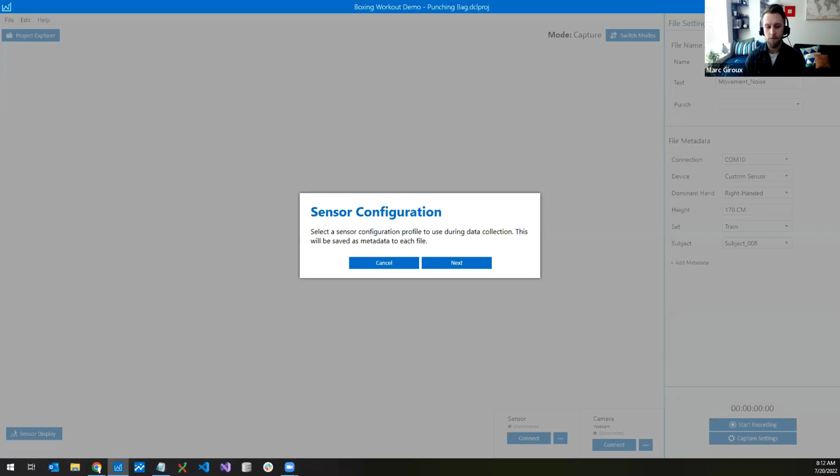So let's jump into capture mode. This is where we are going to do live collection from a device. So the first thing to do is select your device.

We have a range of devices here that are supported from all the big players in the industry. But I also wanted to point out that you can create your own plugin for any device, even if it's not in this list. There's an open source format we have called the simple streaming specification, and as long as your firmware implements this specification, you can use it within the data capture lab.

So I have this custom sensor here sitting with me. I'm going to go ahead and connect to it.

I wanted to point out, we do support 3 different connection types in the data capture lab when you build a model: Bluetooth, serial port, and Wi-Fi TCP/IP. And we support, like I said earlier, this sensor happens to have an accelerometer and microphone on it, but you can add your own sensors and it can be whatever you want it to be.

All right, so now that I have my sensor connected, I'm going to connect over serial. I've already set up this connection, but you can change your connection method over here. And I have this device sitting on my desk.

A big thing we think is important as you do data collection, that we find useful, is seeing the data happen in real time. So I have this device sitting on my desk. I'm connected to accelerometer right now, and I can see the data coming in.

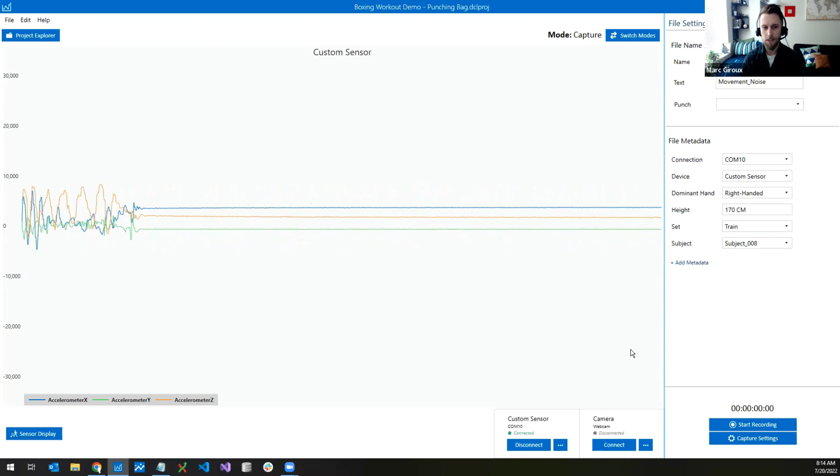So first, I'm just going to show an example of just collecting a file, and then I will get into how to label that file. So I'm going to hit start recording down here. And now I'm collecting real data from this file.

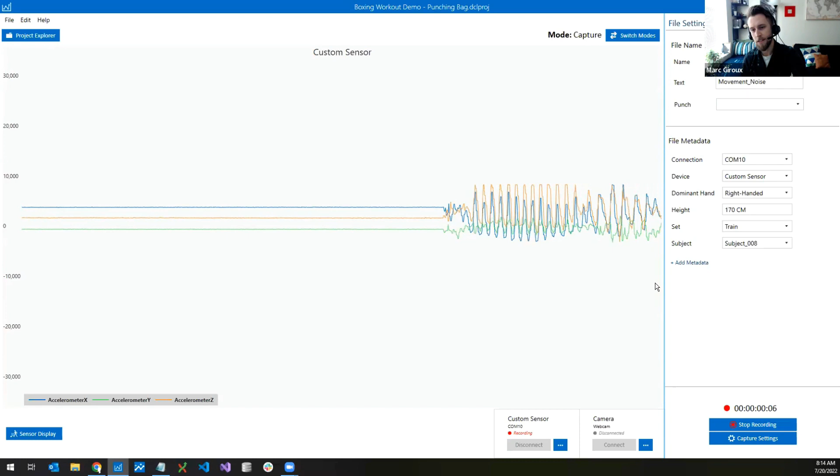This is our boxing demo. I'm just going to collect some noise data here. And you get the save confirmation screen.

The important part here I wanted to point out is the file metadata. You can add any sort of custom metadata you want to your files. This is an important feature because, like I said, it's an iterative process to build a model. You're going to be retraining a model, adding new things, and you're going to find out maybe I need a different model for a right-handed person and a left-handed person.

The other thing that's cool about metadata is you can set up, we typically always have metadata on our projects that is a training set of data and a test set of data. So you can leave data out of the model and pull it in and do testing on it later. And like I said, this is all customized to be whatever you want it to be. This just happens to be what we use for this project. For other projects, we might have other metadata.

So it's a movement file, it's just some noise that I added. So I'm going to hit save here. When you save that, it's going to automatically add it to your project.

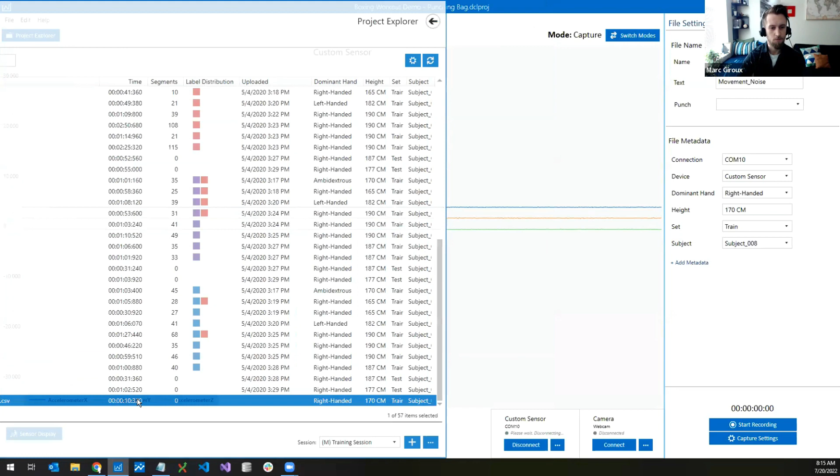This is the Project Explorer. I'll go over this in more detail later, but you can see here's the file we just collected. And I can open that file.

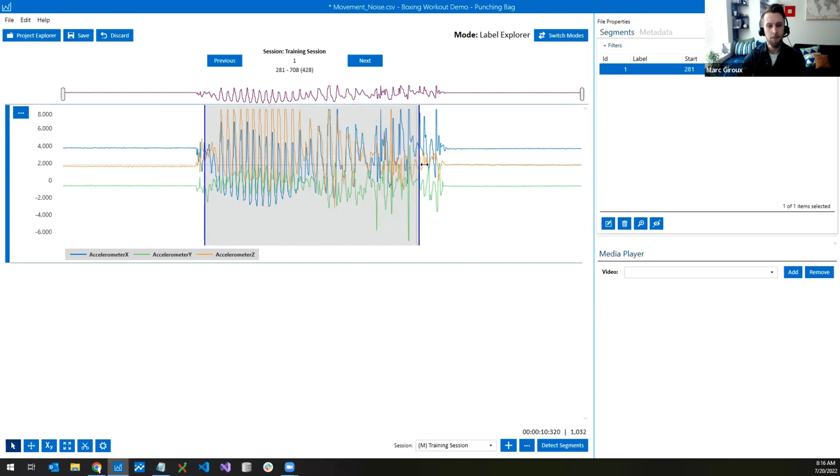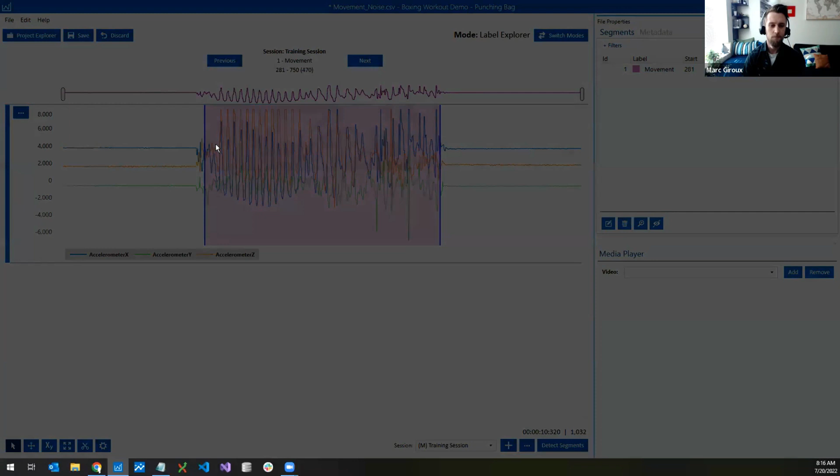Next, I'm going to go over how to actually add a label to this file. This is kind of the standard approach to labeling. I'm going to be getting into a lot of the automated tools and ways that we make this much easier for you, but typically you can see your file data, right click on the graph, and add a segment across the data. And when you click edit here, I can say that this is some movement data, click done, and hit save. That's the typical way you would label a file.

But let's go back to capture mode.

When you are labeling a file, that was a short file, a 10-second file. You might be labeling it for more than 10 minutes, you might be labeling for an hour. I'm going to point out the live labeling part of the data capture lab, so you can add labels in real time as you're doing data collection.

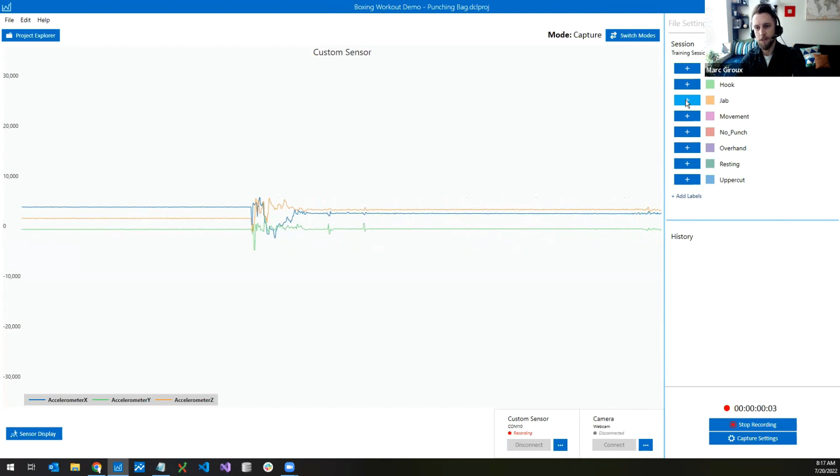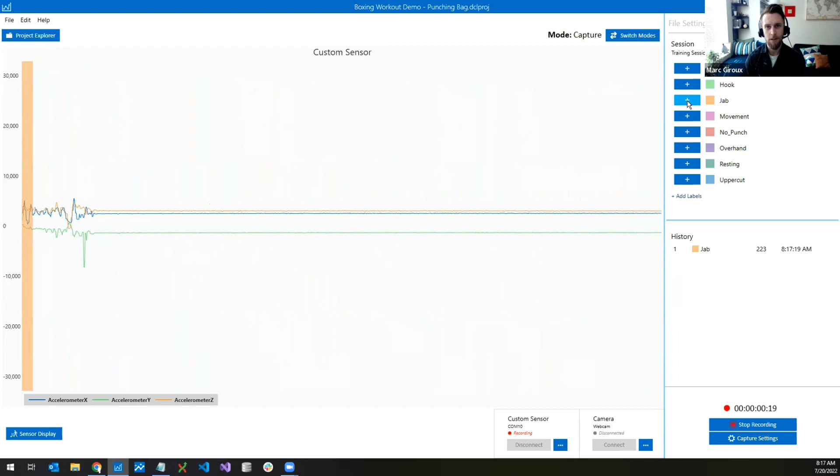If I click start recording here, let's say I want to do some jab labels, I can click jab, do a jab, and click done. This is a small file, but if you're doing 10 minutes of data collection, to go through and custom label everything after the fact is just wasted effort and time, when you could just be labeling it in real time.

I'll hit save here again, and we'll say that this is a jab file. You get a review screen, so in case you messed any labels up as you were labeling, you can edit them here and change them or delete them if they were bad labels. So here's our new jab file - you can see it added the label in real time.

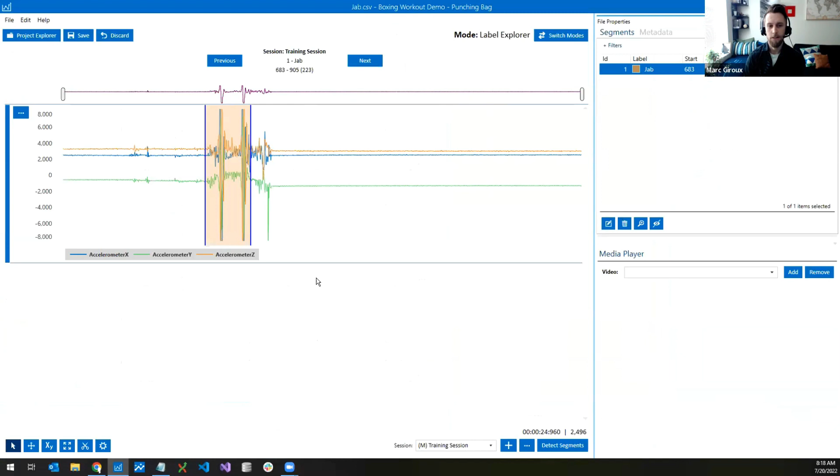Then the other major feature, I think this is one of the biggest features in our data capture lab, is the ability to, we have this test model tab up here. Once you've already built a model, chances are the model is not going to be great the first time, and you need to add new training data to make it better. We can actually connect to a model in the data capture lab and see the model results happening in real time. This is a good way to test it, let alone retrain your data set.

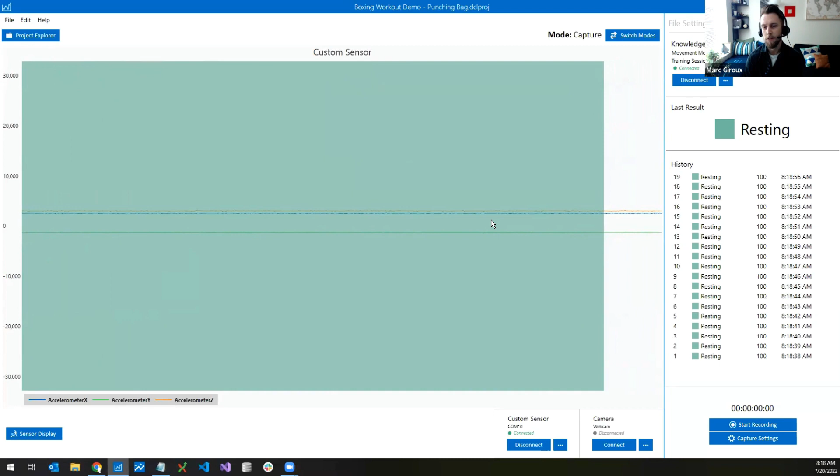We're emulating the model right now, and you don't even have to flash it to a device yet. So even if you haven't set up your firmware yet for models, you can test it out right away based on your training data set.

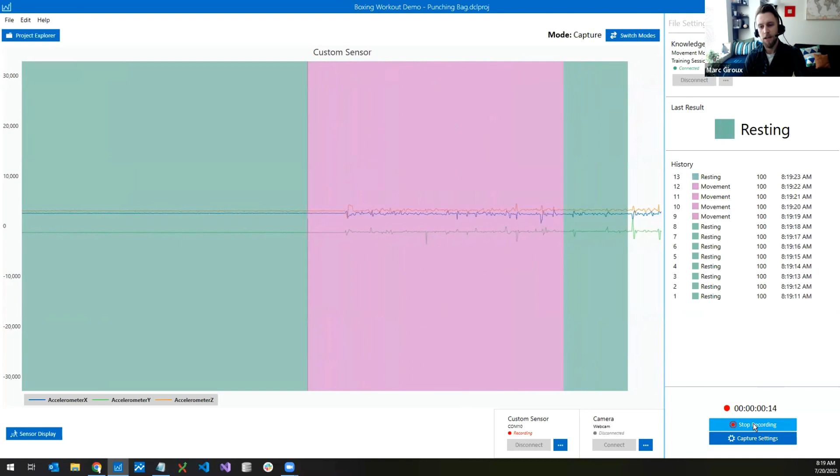If I click start recording here, I can now actually save these results as they happen in real time. Let's say right now this is resting on my desk, and if I just barely touch the sensor, it's coming up as movement. But maybe I don't want that movement to be classified as movement - maybe I want all of these light taps to be considered resting. So it's a false classification.

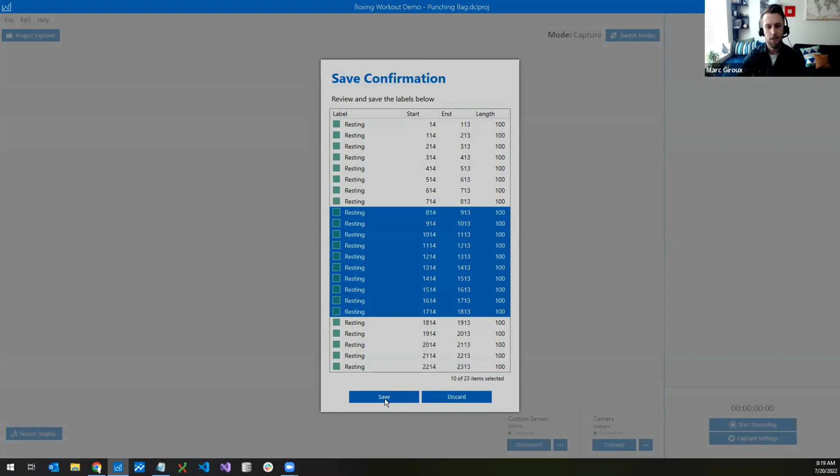If I hit stop recording here, and say this is movement again - here's all the labels I just collected. I can highlight all of these, say that these are actually going to be resting, and click save. And if I open up that file, this file has already been labeled with all of my resting labels, and that's from the model.

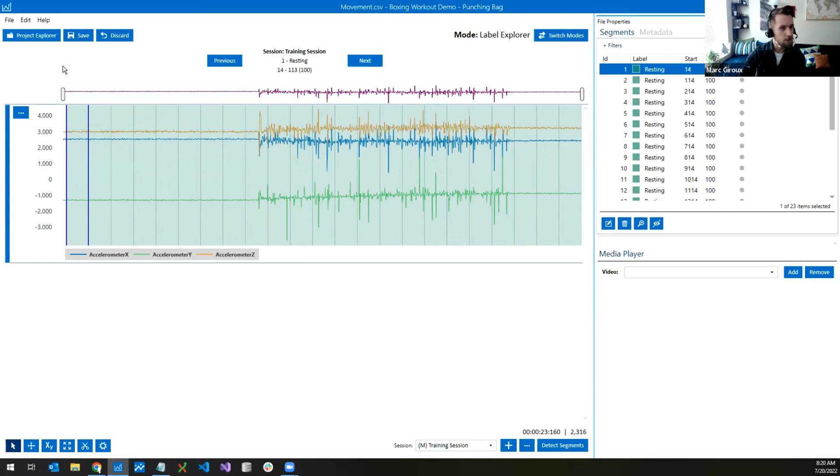So next, we just showed how to connect to a model in capture mode. Not only can you do this in capture mode, but in the label explorer - here's our project view, and this is all of the files that I've already collected before this session. You can see I have my metadata up here, and you can see I've left out some test files here.

So I can actually highlight a list of files, right click, and use that same model - we call it a model knowledge pack in our toolkit - to label these files after the fact. I just ran that model across these files, and this is the results it came up with. I could change them or edit them. You can see the file name is jab, and it looks like we had one false classification in this based on that model.

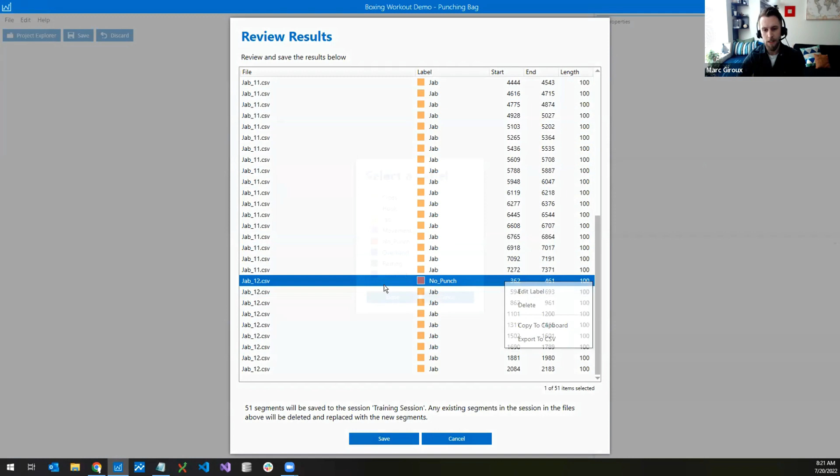So if I wanted to improve my model, all I would have to do is edit that label and change it to be jab and hit save. Now these two files that I just selected are all labeled as JAB instead of having those false classifications, and that's all from the model.

So I could essentially relabel this entire project based on that model within seconds. It's an extremely powerful tool to be able to connect to your model and see the results, then relabel and retrain your model with those results. So I'm going to actually clear out these segments because we don't want them as part of our training data.

And so I just went over the efficient way we have this feature right here from Knowledge Pack. But I'm going to skip over these three features and move on to the next part, but I just wanted to mention them. We do have three other features for bulk updating files in the Project Explorer. So you can highlight a list of files and add your labels to them through all four of these features. And I suggest checking them out on our website.

But before we move on, I wanted to point out a more detailed view of the file open screen. So I've opened up a file here. You can see I've labeled this file. There's four labels for uppercut right here, 3 labels for hook right here, and 3 labels for jab right here. I'm going to first go over the media player down here in the bottom right.

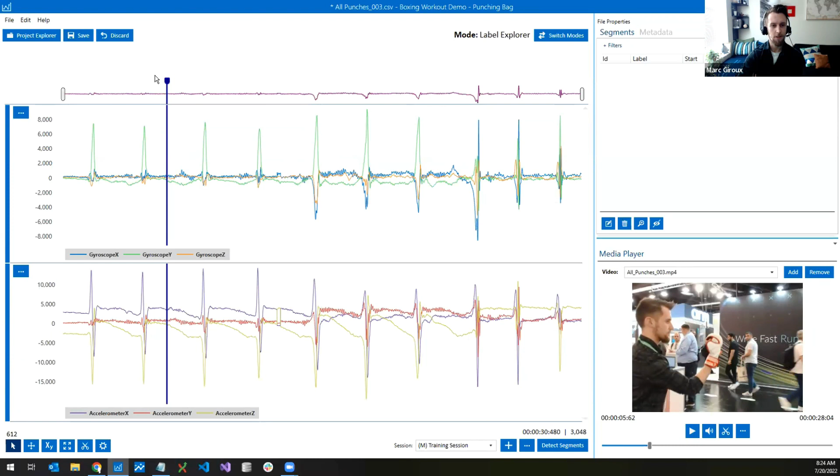And so I can see each of these are uppercut right here, and then jab, and then hook, and then jab at the end. And so this video feature is also a powerful feature for making it easier to label data.

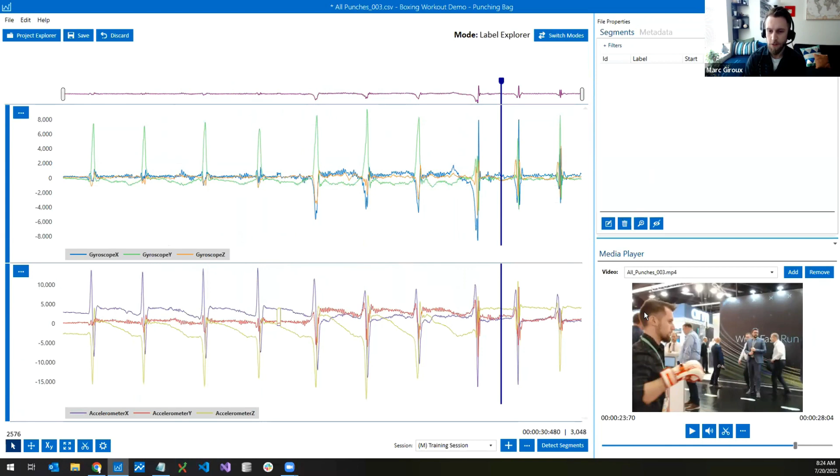I meant to mention this too, in capture mode. While you're doing the live data collection from your device, you can also connect to your webcam. Since I'm using webcam in Zoom here, I would not be able to do that right now, so I skipped over it. But connecting to a webcam means that as you do your data collection and you go and open up those files, it will automatically show up as videos in your files.

So the other feature I wanted to highlight in this screen is, we have this concept of a track in the Data Capture Lab. You can see here, I have a track for my gyroscope data, a track for my accelerometer data, and I can customize the height and range of these tracks. I can lock the y-axis, set my own specific y-axis range. I could add a new track.

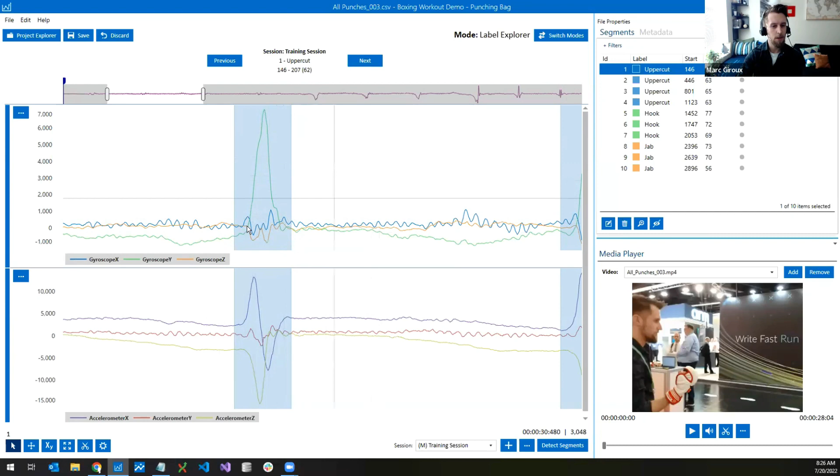And so if we look at this data here and we zoom in, you can see the gyroscope y-axis right now is kind of encompassing all of this data. And so maybe I want to pull out that axis. I can easily do that by clicking update columns, taking out gyroscope Y. And I could add a new track if I wanted to, add gyroscope Y to that new track, and take a closer look at how that affects the data.

And so this is all great for the first time you label, but as I mentioned, when you're building a model, chances are you will have to edit your data. So say I built a model and decided that all of these labels here were maybe too small. They're pretty tight on each of these events. Let's say I want to make them a little bit wider. Technically I could go in here and one by one make each of them a little bit wider, or I could move them over left and right. But it's a pretty time-consuming process.

This project has probably over hundreds of labels in it. And we've had other projects that have thousands and thousands of labels in it. It's a big ask to ask someone to go through and manually update each of the locations if they need to edit it. So we do have a tool that allows you to highlight a list of labels, right-click, and we have 3 different options down here.

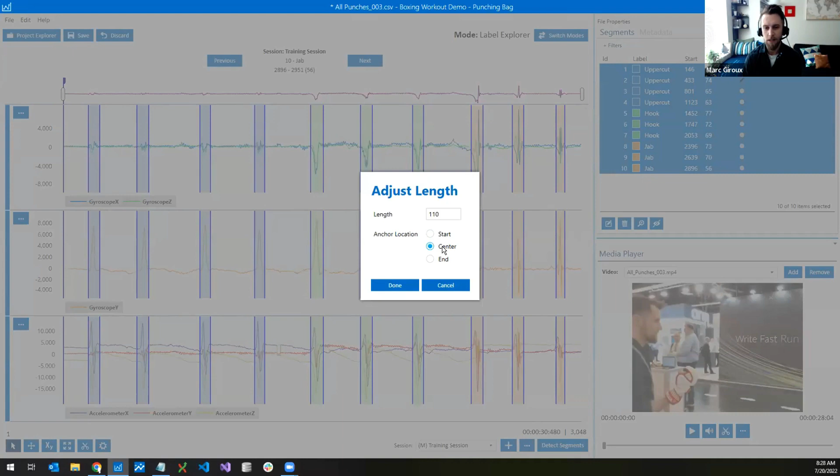We can anchor the location. We can make it 110 samples from each of their start locations or the center location. But since these are all pretty centered, I'm going to go ahead and make the anchor location from the center and expand out. And when I click done here, all of the labels are now the same exact length. They are from the center and they're a little bit wider now.

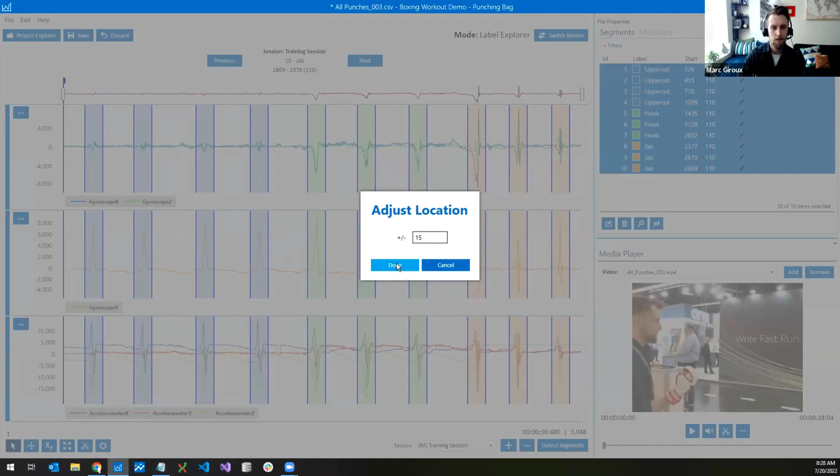The other big thing here that I'll focus on is adjust location. So same thing as length, except it's just moving the labels left and right. So you've got the right length, but you want to move them over a little bit. You can click adjust location. And let's say I want to move them 15 samples to the right, click done, and they all just shifted to the right a little bit.

And so with these tools, it really speeds up the labeling process. And like I said, I didn't go over some of them. I didn't do the adjust size feature, and there's also a tool down here for if you don't know exactly how far you want to move it, you can turn on the move toggle right here, and you can move them over by using your keyboard. And you can see on the segment tab up here, they are all moving left and right.

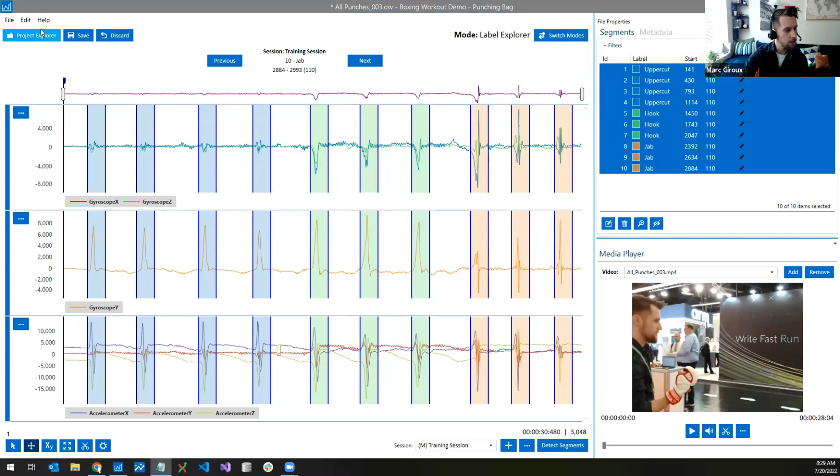And then the final thing I want to go over is some more parts of the Project Explorer. So you can see here in the Project Explorer, here's our metadata that we've added that I mentioned earlier. We have our training set data, how tall someone is, if they're right-handed or left-handed.

The other thing I wanted to point out is the label distribution column here. You can see all of these files that have already been labeled, and you can hover over this label distribution column and see the breakdown of the labels in those files. And so this file looks like it has 2 different labels in it, but if I highlight over that, it's actually 98% the right label. There was 1 bad label in here. So this is great to see it on a file by file basis.

Another nice part is you can actually highlight a list of files, let's highlight all of our files in the project, and you can right click and see the label distribution based on the selected files. And so this is a good tool for seeing your total distribution in your project. You can see the project breakdown of all your labels. The jab, hook, uppercut, overhand labels are all pretty even. They've got about 20% each.

You can see a breakdown by number of samples instead, because just because there's 373 jabs doesn't mean they're all the same length as the other ones. And so you can see the actual length breakdown of each of these labels. So this is useful to see a good project view, or let's say I wanted to look at all of my jab files, because it looks like there are a couple files that have mixed results in here. I can do that same thing and see, okay, 99% of it was successfully classified as jab.

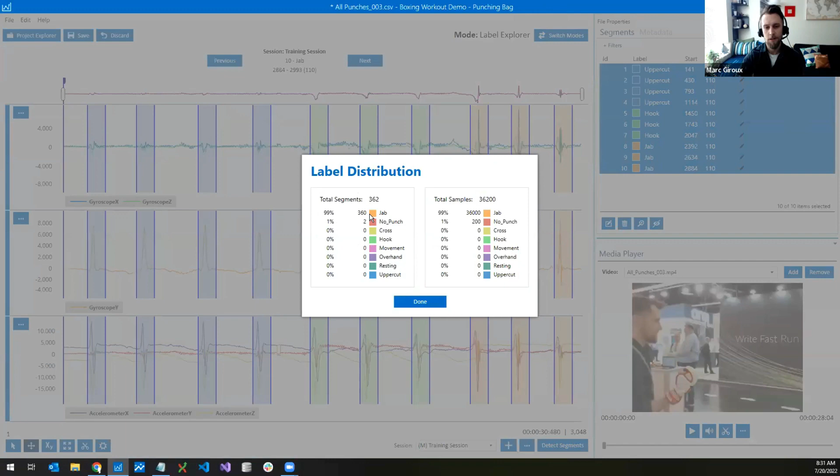And so that's kind of the wrap up of the Project Explorer. There's other columns here, like you can see how long a file is, how many segments are in each file, and you can organize by all of these columns. So if I want to organize by label distribution or the time it was uploaded, or let's say I want to organize all of my test files out of my training set files, I can do that, and then use that same model feature to test out those files.

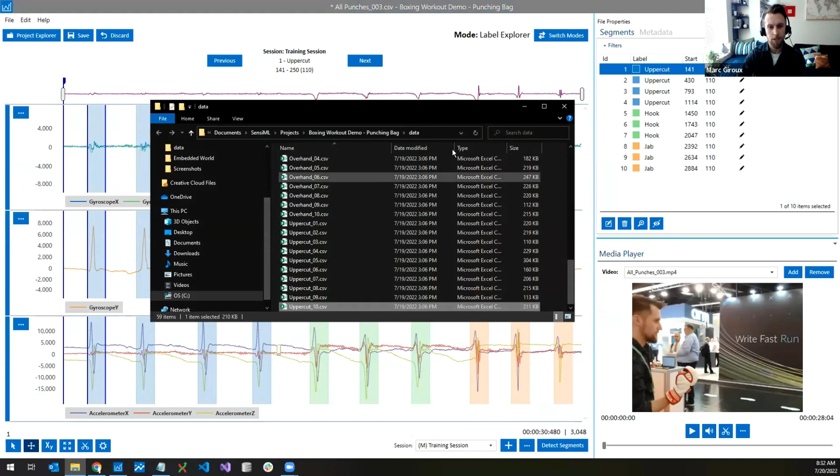And that is going to wrap us up on the data capture lab. And so, as you're doing all of these labels, the data capture lab is uploading these up to our server. Like I said before, it also saves to your computer. So I right click, open in Explorer here. You can see all of these files are just sitting on my computer also.

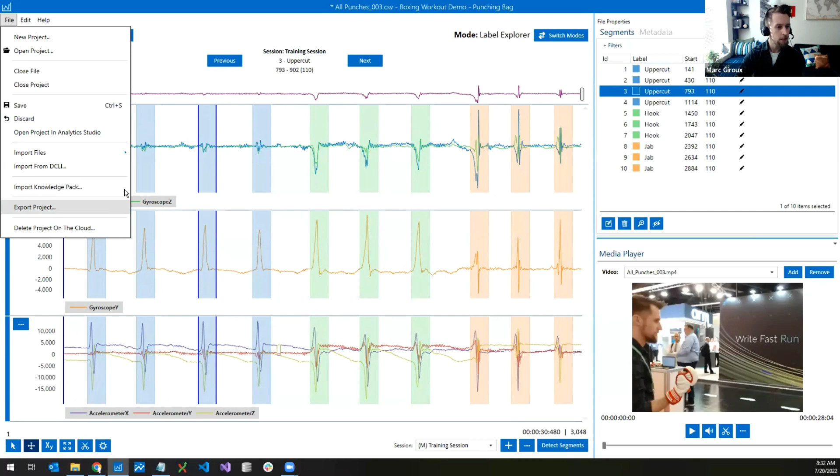And also, like I said, you can export your project out to a JSON format. This is not a proprietary thing where we have your data locked down. You can take it with you. And so I'm switching now to the Analytics Studio, which is the second tool in our toolkit and the main tool that's going to be used for building the actual model.

And so I've already connected to this same project, and the first screen that comes up in the Analytics Studio is the project summary screen. So it's just a basic screen to tell you information about your project, how many models are in your project, how many labels in your project, number of files in your project. But the more interesting screens are coming up.

And so by doing this, we were able to make a right-handed glove and a left-handed glove model because we found that it wasn't accurate enough to use one model for both. It was very easy to just add a new query filter to it and say, only give me the right-handed data for this model. And so we have a left-handed glove and a right-handed glove query.

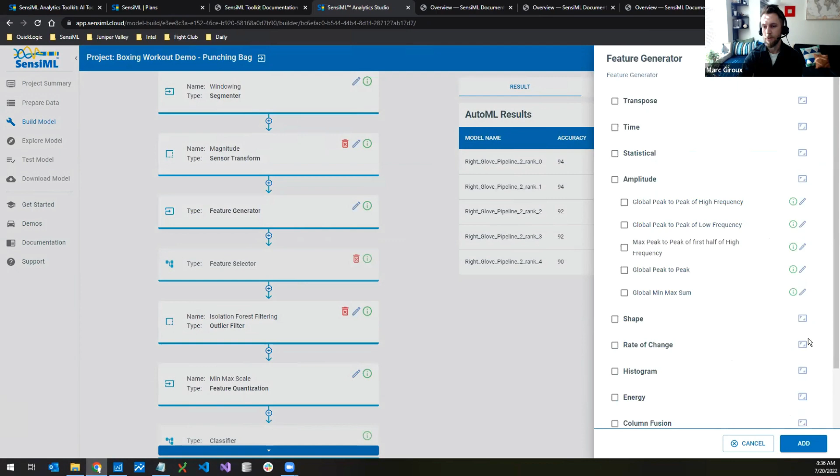So I'll quickly just mention some other things. So we've got our outlier filter step here. We've got our feature quantization step here. And then the other big step that I will spend a little bit more time on is, by default, we selected that AutoML parameter, and we selected the classification algorithm already for you, but you can turn on custom training here and click save. And you can actually see the classifier that was used here.

It pops up when you turn on custom training. You can edit that. You could change it to be any classifier you want. Or you can actually see the parameters in that classifier and change them to anything you want. And so this model happens to use TensorFlow Lite, and we could tweak these parameters if we knew better.

So from there, I've already run the optimize feature, and so it ran through all of these steps and spit out some model results here. And so this is the model results view. After you click optimize, it will spit out the top 5 models that it found, and it gives you kind of an accuracy and a little bit of summary information, how many bytes of data the classifier will be.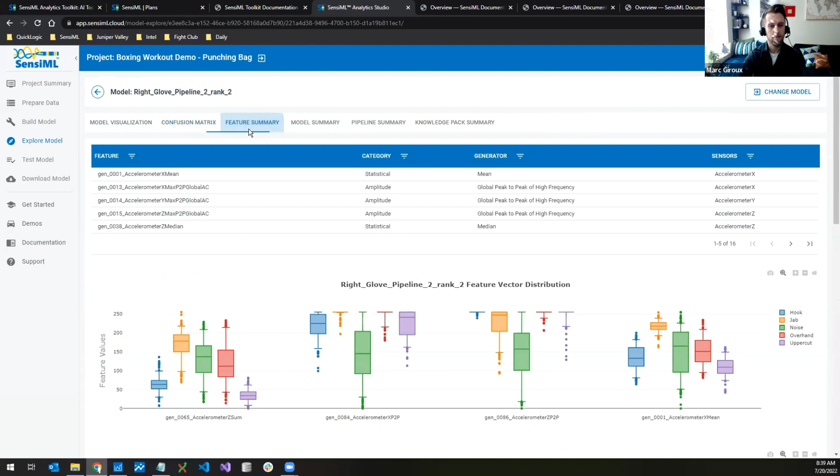Second tab is the confusion matrix for the model. Third tab is the feature summary of the features in the model. The next tab is just the model summary of the classifier. The second to last tab is pipeline summary, which is just how the model was trained. And knowledge pack summary, which, like I said, knowledge pack is a model, so it's just how the code will be generated for the model.

So before we get to actually generating the code that will be on the device, we're going to go to test model right here. And so similar to the data capture lab, you can select a list of files in the Analytics Studio, and you can hit compute accuracy here, which I'm not going to do right now for time, but what it will do, similar to the data capture lab, it will use the model to emulate the results of the model through our tools and give you an accuracy percentage.

And what's different from the data capture lab is it will give you a ground truth versus predicted results view, and it'll also give you the confusion matrix of the results. And so now we get to the download model tab. And so this is where we will generate the code that will be put on the edge.

This entire time, we have not actually even had to flash your device. All of these tools really speed up the process of checking if your model is going to be good without having to flash your device. Saves you a lot of time going back and forth between flashing a device, testing it out, going back, testing it out, going back. It's a time-consuming process. And so now we get to actually generate the code.